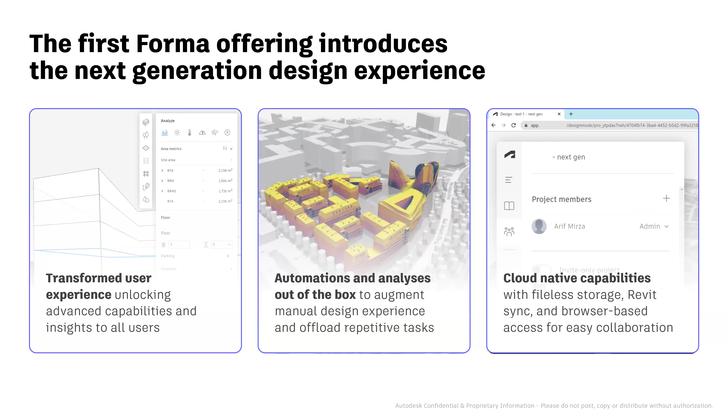These are specifically the five key use cases within Forma. Number one is contextual modeling and handling of contextual data. Second is conceptual design, which is 3D modeling through simple extrude features or push-pull features. But we're looking more towards the next level of 3D modeling, which is automation, similar to how today you might be using Grasshopper or Dynamo.

This is a no-code environment, not at all like using nodes in Rhino, Grasshopper, or Dynamo to define computations. Over here, you don't need the nodes, just values that will drive the entire design flow through numeric entries. It's actually based upon an LLM kind of approach, but a very numeric based one. We have not yet trained it out of the box to work like speech functions and ChatGPT, however, the code allows you to integrate large language models within Forma.

Automation, analysis, and interoperability is a no-brainer because Forma syncs directly with the likes of Revit straight away, and it also imports from Rhino directly. We are building more capabilities so that we can work with apps like TestFit, Veras AI, or Midjourney. They're all on the way to host their extensions on top of it.

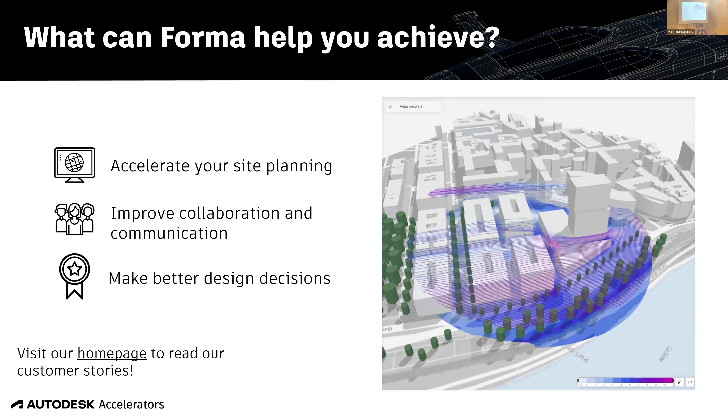Now, we have a long-term vision for Forma. It is actually a multi-year journey. Forma will evolve over the next three, four, five years, and we will see this evolving as an AECO platform, an AECO industry platform covering architecture, engineering, construction, and also operations. The reason it is cloud-based is because of the heavy algorithms for handling big data models. Large models on desktop-based software take a lot of time to be processed, especially when you want to run more than 100.

Then it's going to require cloud computing capabilities, and only through us working with Amazon Web Services, Forma is actually ported on top of AWS. So it's entirely secure in terms of all the certifications. We have achieved all the ISO related certifications for cloud security.

So let's look at the workflows one by one. I would possibly just go into the software itself, which I like to do straight away. I'm just hoping that the internet over here allows me to do that. I'm on my hotspot, so we should be okay.

Initially, when you bring in a project, this is basically how it looks like. You have various hubs - I'm actually part of all these teams, MDC, A49, and so on. But you can create your own hub, invite members, and have your hub settings. Multiple people can work with you on the same project, and you can start creating new projects.

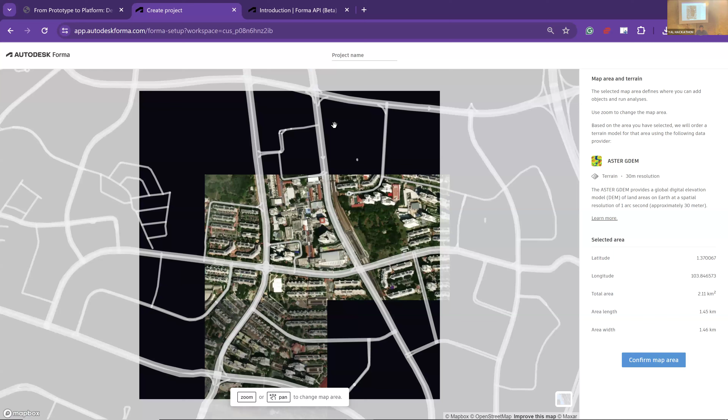Let's say we choose this particular site, and we can go with up to 3.5 kilometers square. I'm just going to confirm this mapping. It's going to now take the data from OpenStreetMap and try accessing ArcGIS and some other GIS platforms that we integrate with, and it will then give you that particular result.

You just went through running it on hotspot. Okay, still works, 10, 15 seconds.

So you do have options to pick different data. Let's say, for example, OpenStreetMap with buildings, OpenStreetMap without buildings, getting a flat terrain, or ASTER GDEM. As we speak, there are more data integrations we are working with. We're also working with SLA so that we can bring in Singapore data. But moreover, we are working with Esri, which has the world's data, and we will bring in more geolocated data for your team.

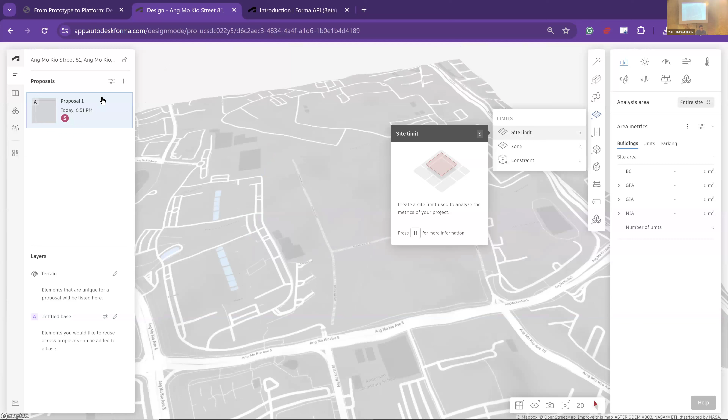And we can close this. So there we go, that's my site limit. Of course, I can always start by simply creating my site limit, or we can begin by importing any models. Let's say if you have existing OBJ, IFC, or DXF models, you can bring those in. So far, it accepts OBJ, IFC, DXF, but through the API extensions, you're able to bring in other file formats as well, like GeoJSON or City GML. It also accepts JPEG and PNG.

So to start with, I can always begin with the site limit, and you can work in 2D for that, just to draft out your site. So I'm just going to randomly create a site here. The site you could also bring in as a DWG. If you have an AutoCAD drawing, it superimposes this. So I can bring it in as a DXF.

And then, of course, you can divide it into zones, you can offset it, you can split it into parts. Like I can just split this site into two parts, and then for each one of the site areas, you can see on the right hand side it will already start computing. You don't have to initiate anything, it automatically captures the data. Yeah, the site data is straight away calculated.

You can start by defining area metrics. For example, you can create an area metric. The area metric can be as simple as these polygons. My area metric, for example, you can give it formulas for GFA, GIA, and net buildable areas. And you can look at residential FSI, floor space index, to be 1.2 of the GFA, and commercial, let's say 2. And we can specify, or we can add more functions. And I can create my metric. Once I create my metric, I would have that specific metric with various GFAs and GIA constitution right away.

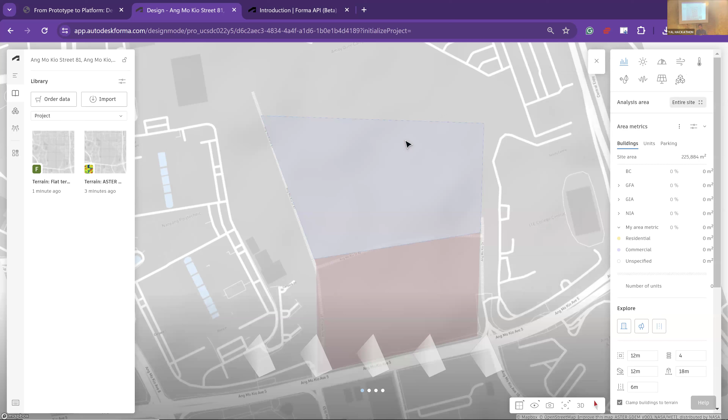Then to begin with, I can always initiate the generative AI, and you can start by simply selecting the site, and Forma will automatically generate options for you. This is also a code that you can access. Now here on the right hand side, I have specific options.

Like I can, let's say, understand the division width. Let's say I want to change the width to 20 meters. It will automatically immediately change your values. There you go. So you try giving it more based on... it's gonna pop up that facade zone, right? It's gonna add more to your options. So here you're not coding, you're just typing values and it will automatically give you options.

But this is where your design is. So that's one way. Once you're done with the option, enter, and I'm in there. My buildings are already populated. You can already see here the total GFA that's been consumed, the GIA that's been consumed, the NIA that's been consumed. All of the data will be populated. And the total site area is always there.

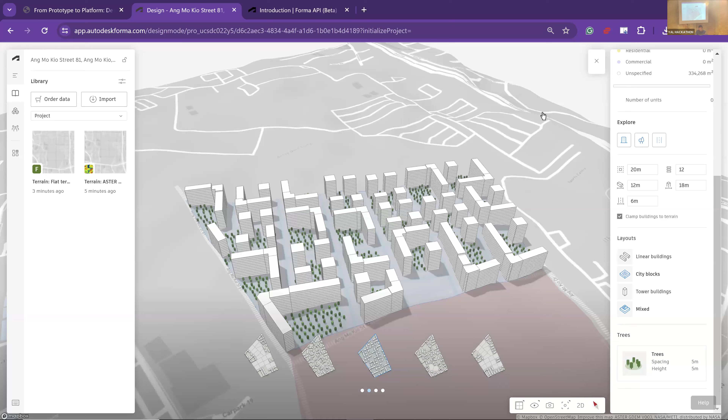And I can also begin by just simply sketching, right, or creating a building pad through automations. I can do a basic building, and I could actually choose the entire site to be the building. And let's say the site that you see popping up like that, right, if I want to create a basement here, okay.

So I'm gonna just go to my navigator and terrain, and you can create a building pad so that you can start with your building design on the pads.

Just being mindful of the internet connectivity, but it's bearable.

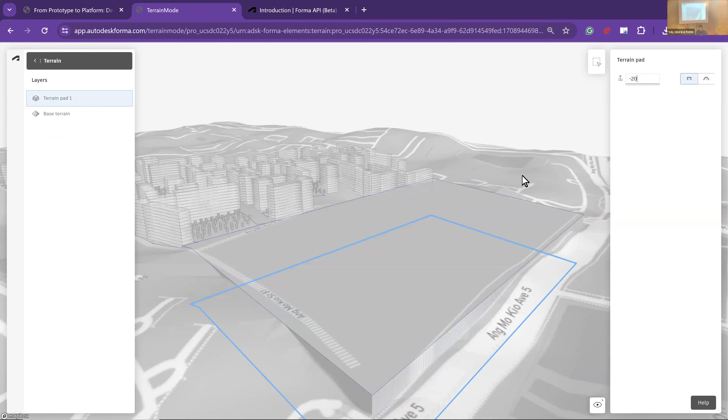We can begin by simply tracing an existing shape and allowing it to fill in the ground, or to go recessed within the ground. So I can go negative, for example minus 20 meters, basement, straight, boom, right inside. So I should be able to work with minus 8 meters.

What kind of slope would I want? If I want a sloping side, I could do that also. So all these are simple features embedded within Forma. And once done, you can always move back.

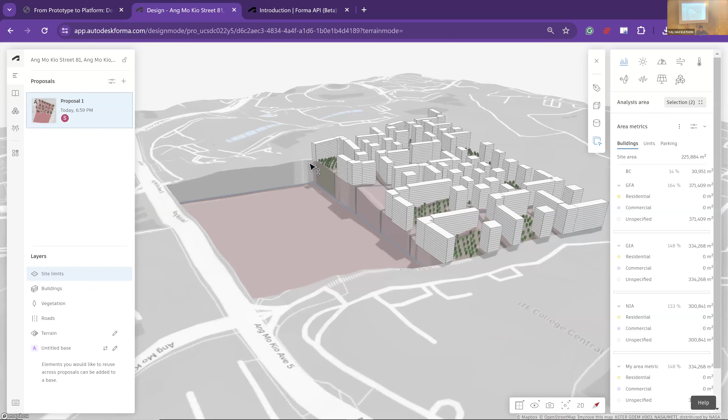So we have this site. Now we can start working towards maybe adding a complete basement over here. Then simply choosing this particular part, let's say 40 for example, that's your base building. On top of that base building, I could actually go inside and start editing the floor plans, any parking, for example, of the floor plan.

Within the floor plan itself, I could start dividing this building. You can actually start drafting using the ruler scale. You can see that it's actually replicating my floor plan everywhere, which I don't want. I could only work on the top floor, like the 13th floor.

Define the space as parking, and you can see automatically it starts designing and giving you the layout. It's quite big, but maybe these zones can assign this space as the corridor on the house or something.

This can also be a small parking area where you can define a different set of rules. So the set of rules for parking can be defined and you can add. For example, in this case, for this parking, I'm only looking at two vehicles, or electric scooters. Then I can have this parking done separately and this one done separately. Just an example.

But you can add more, you can create, you can also delete floors. If you want to delete the 12th floor, the 11th.

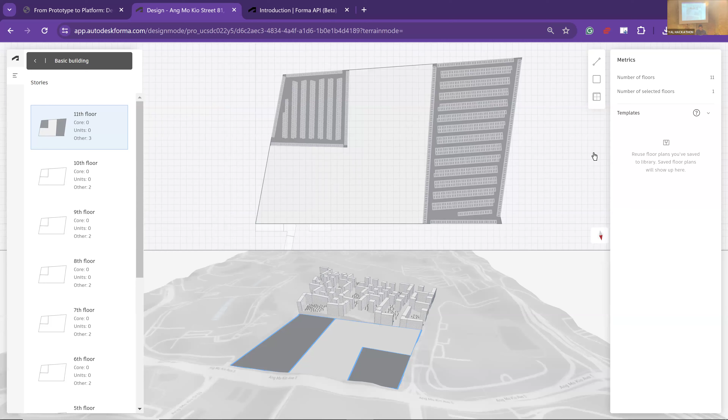There's no real drafting involved here, or neither 3D sketching, but you can also do that. You can actually start 3D sketching. So if I want to begin by creating a 3D sketch, I can leverage that 3D sketching capability. I can show you some examples.

However, some of these basic buildings can also be directly created here, and you can start working towards some standard units and so on. That's the building unit, and I can start adding the height, number of floors, same as for the larger building, towards a smaller building. And probably change the function of this building, make it commercial or residential, and it will automatically update my GFA and GIA based upon it. So there is no manual entry as such. Everything happens automatically when you start giving it different functions.

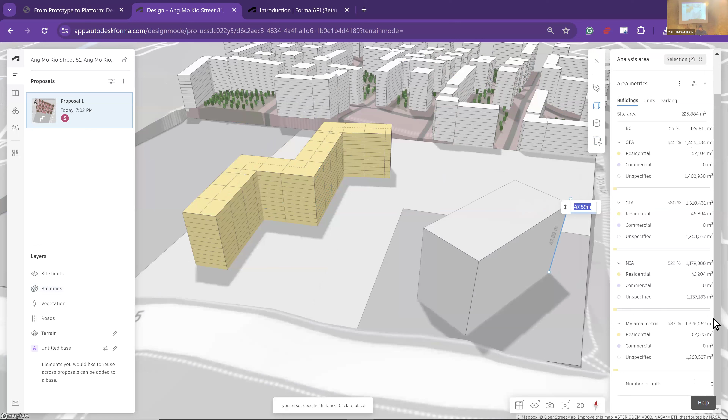Of course, we can work with simple volumes, generic volumes as well, the simple boxes. I'll just draw out some kind of example there. And then this mass, you can actually edit in the sketch mode. So in the sketch mode, it will allow you to do more.

Edit sketch will really work something like if today you use SketchUp, or maybe in the past you might have used FormIt. NURBS modeling is something which it doesn't do today, so you would probably have to use Grasshopper or Dynamo to bridge that gap. Because we have direct extensions, you should be able to do it. We'll look at it.

So I won't go into the editing functions because it will probably take more time, but I'll show you some examples of some different forms that we can do.

So that project has been saved. Now if you want to pass it on to someone else, you can invite project members so that they can start contributing.

So now I can add project members and invite somebody who is a collaborator. I can just type in here the email. It could be a collaborator or an admin. You can give access and send the email. If you guys have your laptops, I would encourage you to just try, there are trials.

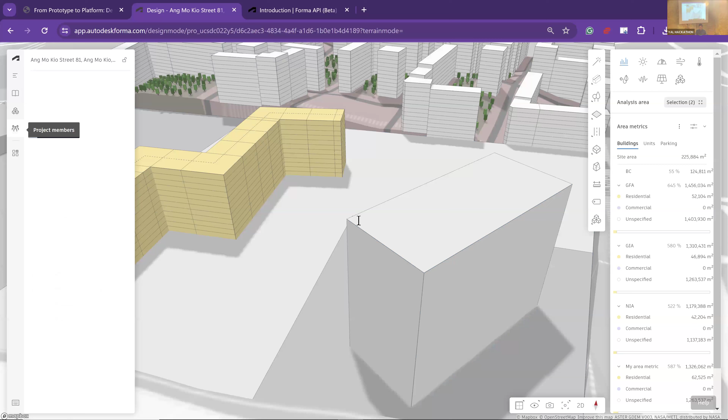Now I'm going back to a project which I've done before. But remember one thing: the approach of Forma is different than our traditional sketching and 3D modeling tools, because we start with data in mind, with outcomes in mind, and we don't really start with lines and squares and rectangles and so on. We actually begin with data in mind and with some outcomes in mind.

However, sketching capability is there, but I would encourage you guys to really start thinking through data modeling or through some analysis that you'd like to try. Then form will automatically follow the function, but you first determine what function you will do. So I'm going to go to the existing example.

I have multiple proposals in just one project, and you can see how many collaborators I have. I have Tablan, Vivian, and Tanya, and so on, John, as my collaborators. So multiple people can work on the same models, different proposals. I have roughly 5 proposals here, proposal 1, proposal 2, proposal 3, and the site data is consistent across all proposals. There is no real copy pasting here. Everybody is using the single source of truth, the site.

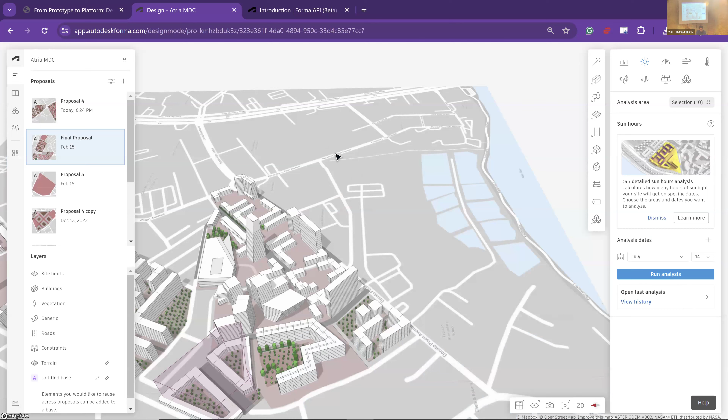And there are some existing buildings here as well. Just for form itself, you can see that you can create buildings like these, right? You can also create curves, but this is just an example of an edited sketch 3D mode. And I can edit that in 3D sketch as well straight away. I could also create forms like these, tapering forms. So there's really no limit in terms of what forms you can create, except NURBS modeling.

Remember, double curves will not be modeled. You would have to use Dynamo or Grasshopper to really do double curved surfaces and so on. Single curved surfaces, yes, you can do it with Forma. Single curves, it works.

Okay, so let's go in there. And these kind of things, right, they're just editable on the spot. Say, for example, I'll just zoom in. You'll see that all these points are editable and it impacts your entire flow. So it gives you those editing capabilities and you should be able to work with different building geometries.

Right. And then individually, you can also change the parameters. Same way, I've created different floor plans for this particular building, and in the plan, edited this geometry as well.

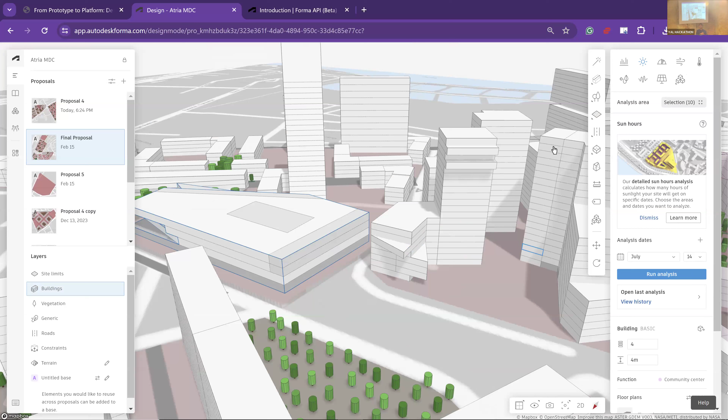Let's look at the analysis capability. So those were the modeling capabilities. You can also add roads. The important thing about adding roads is it will help you for your analysis. So let's look at this road. This particular road has data that I would use for analysis. Number one is the speed of the road, the limit, right? Is it 100 kilometers per hour or is it 60 or so?

The average daily traffic, 10,000, up to you. You can get the details from your nearest traffic station, or if it's available online, you can get the data from there and key the distribution of your traffic: morning 84%, evening 10%, night is 6%. Heavy traffic is 50% of the time. If it's a busy road in the city, you can say that it's 50% of the time. And that will be helpful for the noise analysis.

Now, let's go to analysis. First, of course, area metrics. I can quickly run through area metrics, which is how much area is consumed by hotels, how much area is consumed by commercial, residential, all of the area distribution. And you can see that immediately, you can go one by one and check on it.

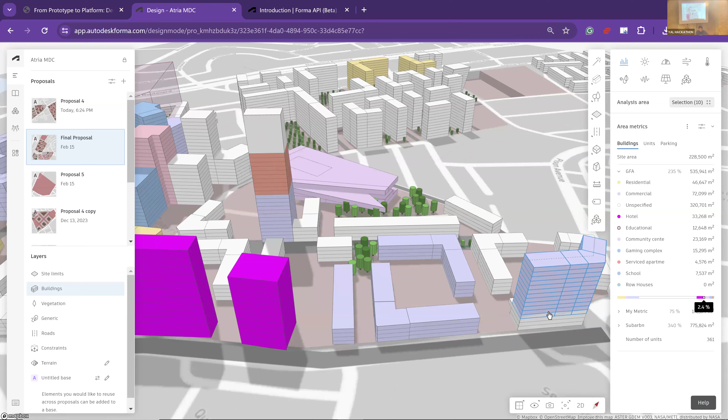Now let's say I convert a particular building, you can see that the educational area is about 12,000 meters square. But what I'll do is I'll take this building's function to education as well. So immediately my education area should pop up, it should increase, the overall education level. So now it's 17,000 meters. Instantly the data is just connected to each other. You remove the function, the number of square meters is gone.

Even if it's a single floor, you can still change the function by floor. So one floor, I want to change the function and set that specific floor as, say, a school. You see that immediately, only from that floor, I've changed the function and it will impact my overall area metrics. There's no calculation I'm doing for this—it's automatically getting picked up by the AI or the engine. Right, so that's area metrics.

Now we look at sun hours. Let's go to historical analysis. Normally the analysis will take anywhere between 20 seconds to 2 minutes for sun hours. You can run it, or I'll just read the historical analysis.

So on January 23, I did sun hour analysis, and it keeps a digital record that is maintained. So if you did an analysis 8 months ago, it's still there. And once the analysis is done, you can actually start inspecting this.

Let me just hide the controls. So here, I want to analyze the spaces which have less than 4 hours of sun. Because we are in Singapore, we are on the sunny side of things, so you're going to have more sun, right? The majority of the surfaces of your building has sun more than 5 hours.

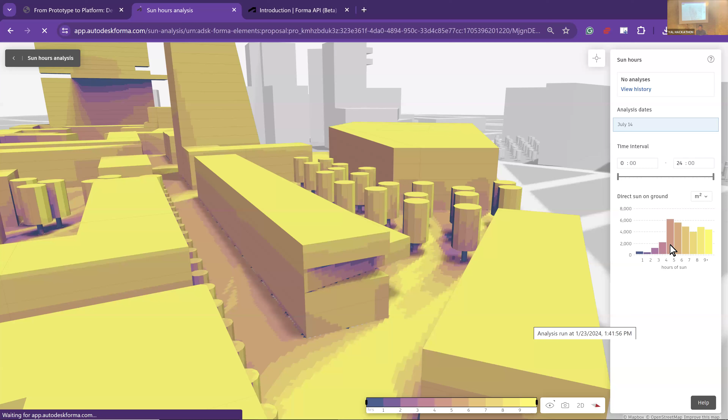You see that, right? And here you can also look at the distribution. You can see that the average sun hours on the left hand side is 4, and it covers 30,000 meters square that is greater than or equal to 4 hours, and 4,769 meters square is less than 4 hours.

So it took less than 20 seconds to regenerate based upon my time, right? So now you can see that my sun hours has probably grown a bit low. Then I can even inspect wall by wall. If I want to go and inspect here, it will show me that this wall, this facade has 4.7 hours of sun. And you can inspect all of the builds.

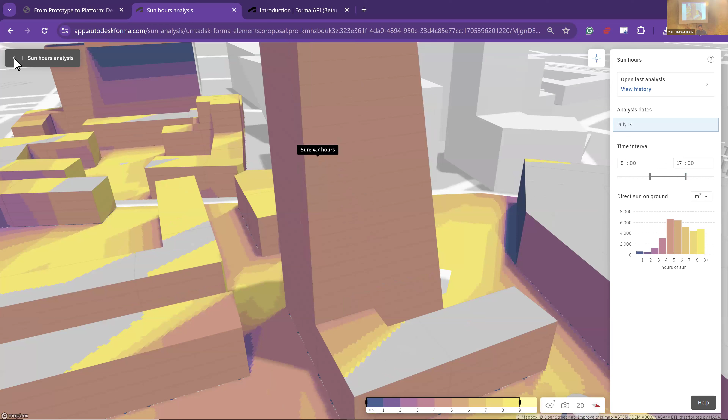So that's sun hours. Similar goes for daylight. Daylight is quite important because some of the functional spaces which are always inhabited by people, you want them to be lit by natural light. So you can try and understand which are those spaces.

So I can go to daylight potential and here I'll get a percentage. So here you can see the achievable daylight. So this is all in the dark zone, like 15% and so on.

But there's very little, as you can see here, these buildings are very close to each other, so most of the spaces over here don't have enough daylight. You can instantly understand them, right? And if I want to inspect, let's say for this building, this patch is completely under the dark, I can inspect this and say only 9% of the time there is daylight entering this.

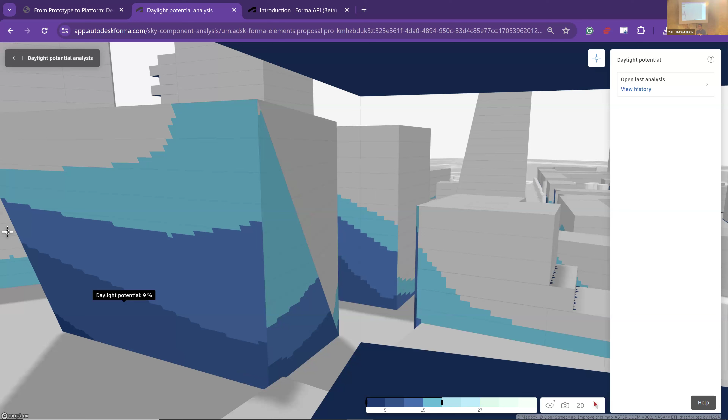So I can take those informed decisions on where, even if you're generating a particular design or a form, that will have an impact on the natural elements that we design. So we can change the form to enable more daylight in this case. Of course, this is good because it's inside, so it started capturing things like niches and so on.

So the data analytics and the representation is the same for all kinds of analysis, which always gives you a slide bar below and a bar graph on the side. So it's good.

So now we can go to wind simulation. It can take some time, might take 30 minutes or so. So you can actually open two browsers - in one browser, you let the wind simulation run, and in another browser, I can just open multiple browsers.

If your internet is great in the office, you can open 5, 6 browsers, it doesn't matter. You can have multiple proposals open because it's web-based - cloud computing, unlimited users, unlimited.

Effectively, anything above 100 Mbps would be good. If it's 50 or 20 Mbps, it's gonna be cranky, so I would advise not to. Anything above 100 Mbps, 1 Gbps, it'll fly, right? So it really depends upon your internet speed.

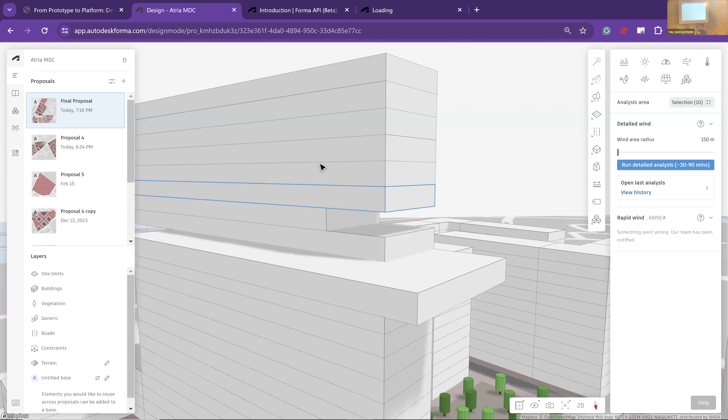AI rendering - yeah, we already have Veras AI extension in here. So you can use Veras or you can use Midjourney, but Midjourney right now is not on the platform. In future, you will see them coming in, but you can use Veras AI.

So now what I have here is actually the pedestrian comfort. The wind drag or retardant effect, or whatever you call it, creates pockets in the city or urban areas where you'll see standing zones where people can comfortably stand, but there are uncomfortable zones which are the red zone, and zones where you have to walk in order to feel comfortable. So you can inspect those zones.

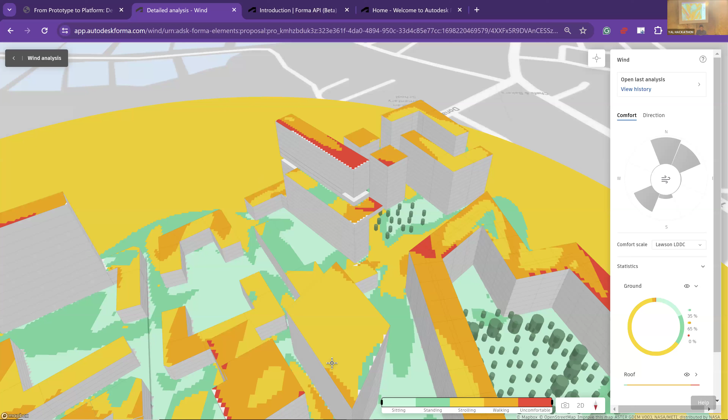Let's say this zone here, I wouldn't want to place a public space over here. I want to place it here so people can comfortably stand. That analysis you can do, and you can understand that standing dominating direction here is north. Over here, walking dominating direction is also north. You can see majority of the ground is actually in the strolling or walking zone because of the prevailing wind conditions. However, there are some good pockets where you can start putting in some public spaces.

So it will give you that kind of analysis. If I want to filter further, I can say I want to look at spaces which I can use. These are your pockets within the urban precinct that can actually look at popping in some public spaces, or have a cycling track.

So that's fairly confident. Now, if I want to look at the directional data for the wind, let's say I want to look at south, and stream height variations, and make them visible. See that the wind simulation is directly accessible. It will show if there are any vortex formations and so on, it'll be able to simulate these conditions. If I change the wind direction, it will automatically change its CFD.

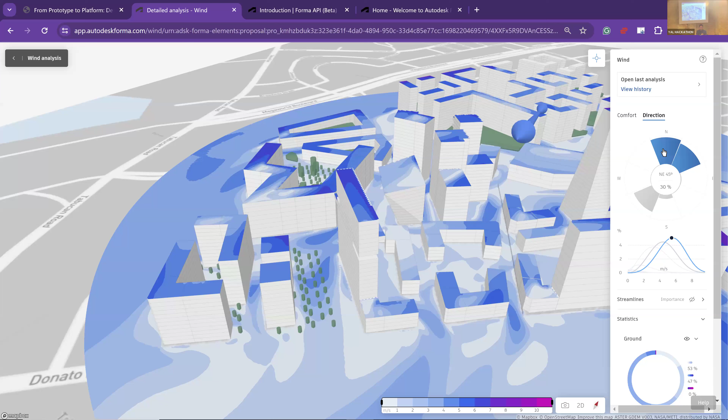We use OpenFOAM as the engine. OpenFOAM is popular; many CFD softwares out there use OpenFOAM as well. If more details are to be understood, you could look at our documentation. There are white papers we've written on what goes behind this. So if you want to use those in your submission, you could do.

Like RSP Architects in Singapore, they actually used the background data as part of one of the submissions. They did win the competition. They used Forma to generate all this analysis in their final proposal.

Again, you can work towards height variations, or you can only look by height, meaning how to check at 8 meters or something like that—only at that particular level I'm interested. So I can say I'm only interested at 20 meters, then my CFD or the vectors are going to be active only at 20. So there's a lot of data drilling you can do so that you can represent your wind much more efficiently.

Okay, any questions around this?

You can extract images from it, but if you're looking at them to be 3D lines in space, for now, no. What's more relevant is the report. When you design, what we're trying to do here is once you understand how the wind flows through the area you're planning, you orientate your design so it allows you to capture as much wind flow as possible. With more wind flow coming through your building, like these houses, you improve the thermal comfort. That's what makes your design more optimal.

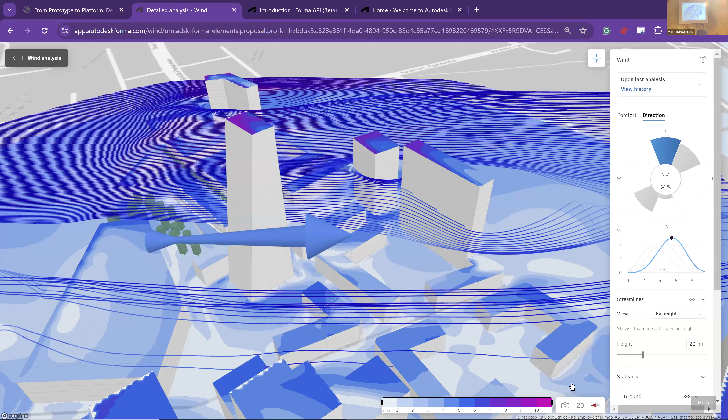Well, you can capture the image. You can do a 4K screen capture, you can save the camera position, and you can extract the PNG, but 3D geometry of the CFD, not fun. No—you can extract the buildings as a Revit model or as an IFC model, but the CFD lines themselves are only for you to create a report.

So that's not even possible. We can check, but I'm not really sure whether the embedded view API will work, because it's an embedded view API, so anything embedded in the view, you should be able to access. And that's the objective—if you think that's a use case for you, you can write it down for now, and we can document all these use cases. Forma is an open platform; the API is made available to you, so anything you want that's outside what we provide, you can develop.

So like, do an editing in there, right? Then let's see if I can. The analysis is there, it will stay, but I can edit it a bit.

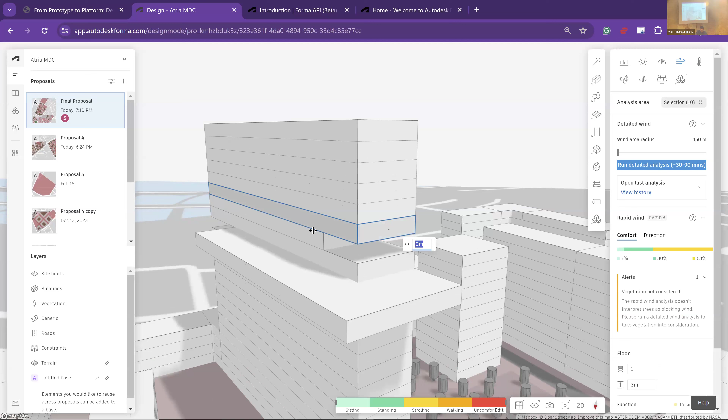Yeah, you can save that. Right now I'm just going to create a pocket here, edit this first. I'm going to create a bigger pocket and we hope that the wind lines can go to, or like, cutting through.

You probably have to edit in 3D Sketch to do that. Within this, okay, there's a way. Hold on, we can edit the floor plan here, let's go and add the pocket plan here to be able to create a hole. So that's this one, okay. So I can potentially space and delete, yeah delete that. So I can create it, but you have to define it in the plan. Okay, so the void is...

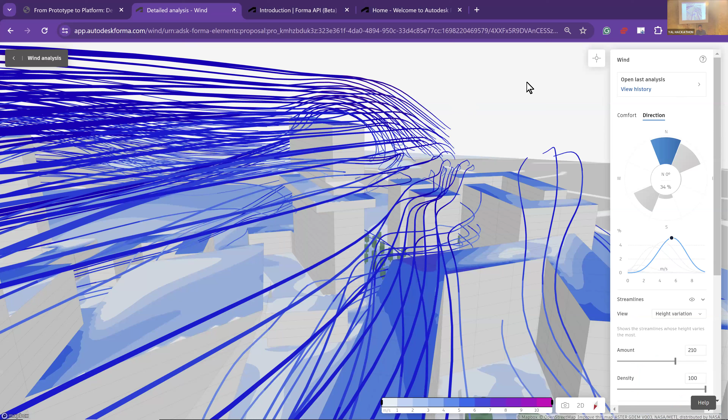Okay, so let's go to another analysis, which is microclimate. Now, microclimate, there is no history for now, so just run the analysis.

Well, on another window, we can look at another analysis. Here, let's look at operational carbon consumption.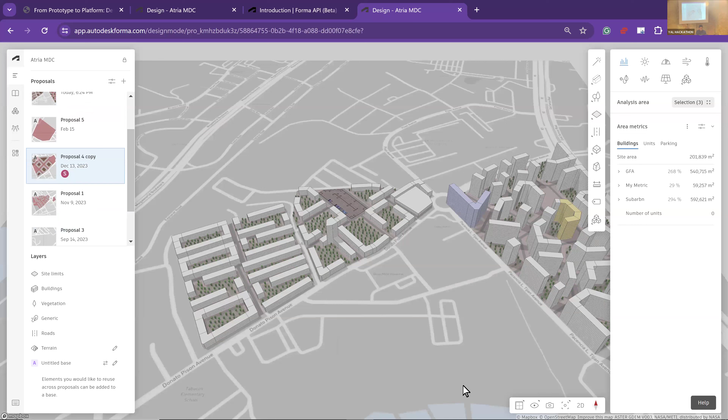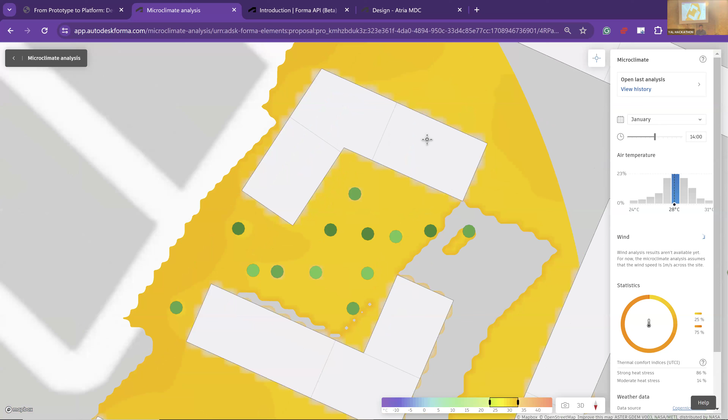So it's ready, right? About a minute or so. Now we can look at the microclimate. So we just took this area. We should define the area in detail, but you'll be able to see whether this particular zone, what is the temperature there. Almost everything is above 25 degrees anyway. So if you change, you can see this zone, this is less than 30. No, everything is above 26. Then you can inspect here, so it's 31 degrees, and here it's 31 as well. However, in some other pockets outside, here it's about 36 degrees. So you can simulate the microclimate in any zone like that.

So roughly 75% of the analyzed area is above, let's say, 36 to 37 degrees. We have 5.5% in 32 to 50. It also captures the humidity and so on.

After microclimate, we can look at operational energy. So operational energy actually depends upon what materials you use, or let's look at the criteria. Right? So if you see right now, if you look at the settings, the advanced settings are still in beta, but you can define, let's say, if I define an uninsulated roof, it's going to change the amount of energy I'm going to need.

So here, the range is 132 kilowatt hours per meter square. Buildings which are running anywhere between 164 to 196 kilowatt hours per meter square. So if I change it to uninsulated roof, it will immediately change the operational energy factor, going beyond 200 already because the roof is uninsulated. If I change back to insulated roof, or maybe insulated with wood or something, for now there are limited options, but in the future there will be more.

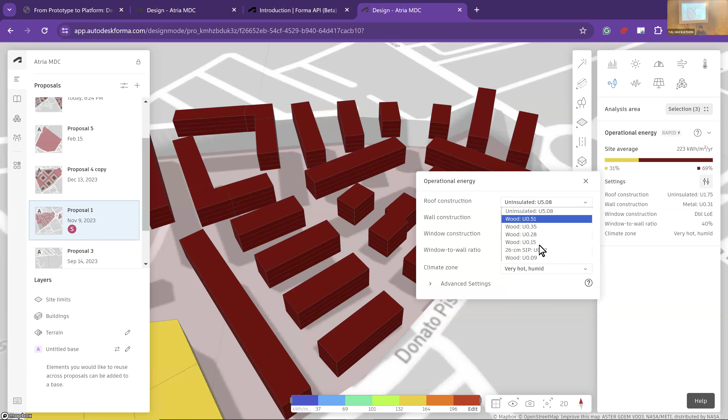Noise analysis. So noise analysis is interesting, let's look at this zone for noise analysis.

Like I previously mentioned, if you have your road factors and the traffic density in there, then it will give you the noise solution. So now I can see that 75% of the spaces are in a good noise zone, which is less than 55 dB. You can see that these facades are impacted heavily by noise. Okay, so if you change the traffic conditions, this will also change. I can see that 12% of the facade is having more than 65 dB, and 14% of the facade is anywhere between 55 to 65 dB.

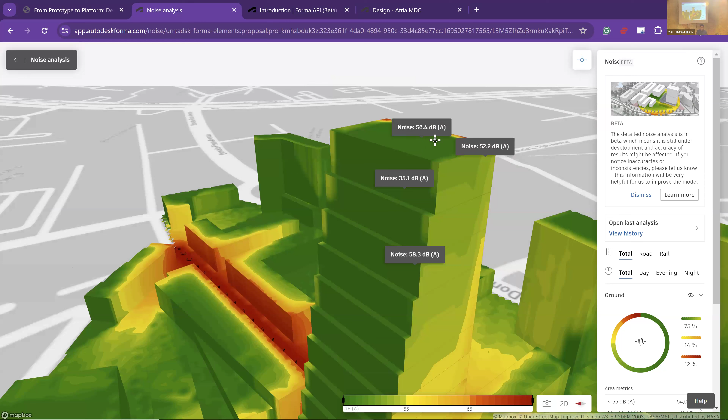So whatever is acceptable to you as a designer, you can take a decision or propose a different kind of facade treatment to address the noise. Like here at 65 dB, it's quite a high level, but as you go up, of course, it's going to go lower, 58 dB, as you go higher, 56 dB. On the sides it's 52 dB. So anything you see green is beautiful for the ears. 35 dB is great, no sound. So you can analyze your sound.

After sound, you should have the solar potential. A solar potential was added recently, like 2-3 months ago. If you look at solar energy potential, this allows you to look at the total energy that you can generate. So let's look at the historic analysis that we did, number 9, just going to run that analysis.

On the right hand side, if you look at the entire roof of this whole block, whatever buildings we have selected is going to generate 98,670,487 kilowatt hours of energy. That's the total solar energy. Average solar energy per meter square is 1688 kilowatt hours.

Now if I increase the surface coverage or the panel efficiency, the amount of energy generated is going to go up. Let's say you're using advanced photovoltaics that capture more sun, that increases it by 20%.

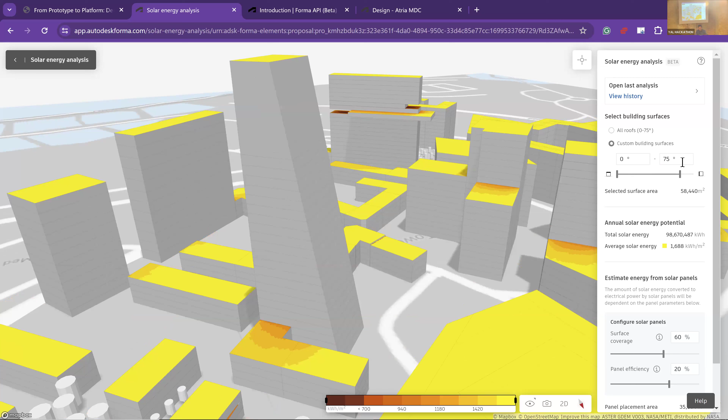No, it did not. What can I look at, 80? Yeah, it got it, there you go. So this facade is more than 75, it's at 80 degrees.

Place solar panels on this particular surface, and your average solar energy is going to be a certain number for this space. This is going to generate roughly 666 kilowatts per meter square. So instantly you're able to understand the total solar energy, and hence how much carbon you can save, and you can immediately run an analysis on it.

Any questions on this one? So the analytics is the same for everyone - the representation levels, the filtering, is all the same for all analysis.

Sorry, landscape replacement - I need to understand that more specifically. How would you do it in normal circumstances? It depends on each area. For my project in particular, in my area, we need to have 40% landscape placement on the roof. That's throughout, as in anywhere. Yeah, so if you cut a pocket here, you have to add it somewhere else, right? Yeah, that's a good use case for right now.

Just trees - I raised this question to the product team, whether we can start adding scale. I think right now we can only do the trees, we can only do one. I can't really go and place landscape.

For the trees on the ground. Yes, but not for the wall. By the area of trees, let's say I define it like here.

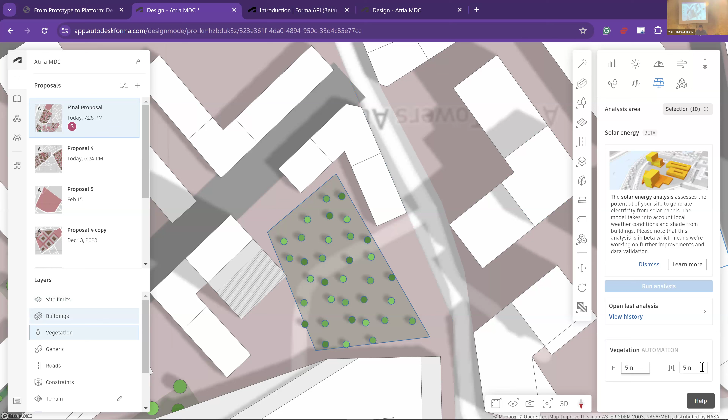The 2D view isn't always great. It means we can plan here, here, here, okay. So for that area total, you have the height of the tree, the distance between the trees - let's say a distance of 3 meters, you can use that. So all of that you can do.

And I think in the area metric, you should be able to get the vegetation area as well. So let's look at vegetation.

It's still manual - I mean, of course you have to define the surface where you want to place the trees, but it's going to get considered in your microclimate analysis, so it's going to reduce the temperature in that area.

My humble request to our product team has been, 6 months ago, to add it on the roof possibly, because I'm a big fan of green roofs. I'm a Kenyan fan, so that's the reason. That is why that's being processed - exactly, because everybody asks me, so I'm sure.

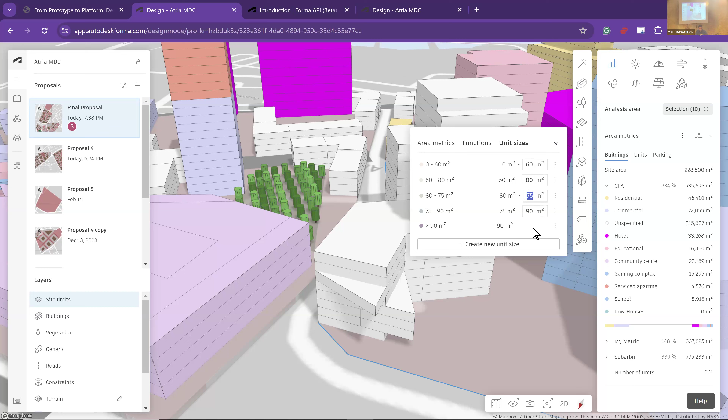The unit sizes, you can give definitions. If I'm running unit sizes, I can give my minimum size as 0 to 60, then 60 to 80, then 80 to 90, then 90 to 120, and anything above automatically captures. Potentially, you should be able to create a new unit size and more sizes.

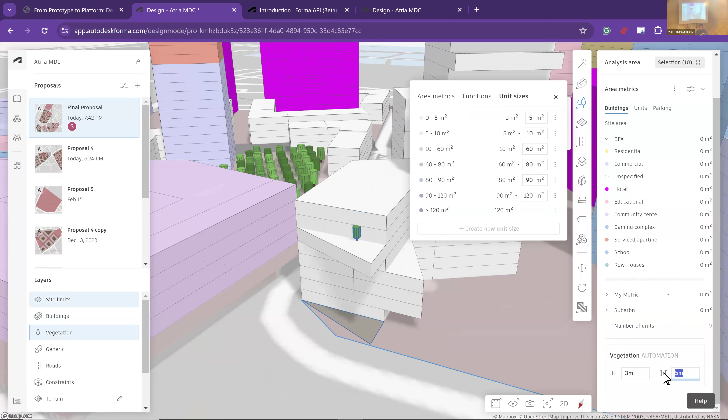So we are done with the analysis. There is this analysis right now, and the extension is what we will go into. So let's look at Dynamo, Rhino, some of the configurators. So this is all out of the box.

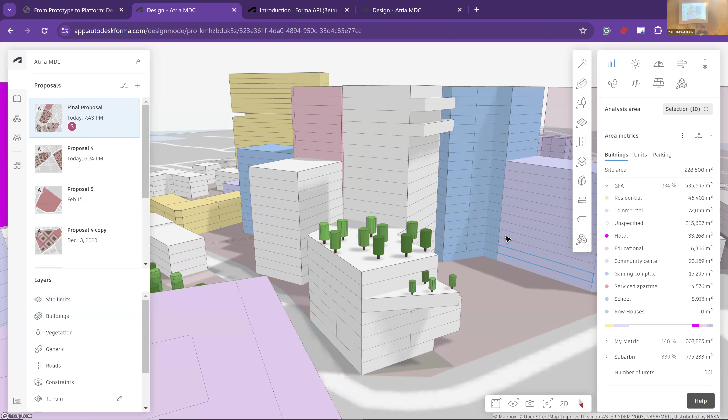Forma's usage is up 10x since it's launched. We have more than 200 architects using it worldwide. Only for the out of the box features itself, you can start leveraging on them. Of course, it is a web-based platform, so your browser settings are going to impact the software.

Let's go to the PPT, straight to Rhino plus Forma. Sending proposal to Revit is something you can see now. So this is Forma, and we can send this data to Revit straight away. So that's your Forma, and this is Revit, and through your direct plugin from Forma, you can directly show the data.

Let me show where that is. Let's say this proposal, I'm just going to go to a smaller proposal. Let's see whether it opens. Okay, so it's a smaller proposal. Let's go to this one, here, no, this one. So these three dots, and you can send this to Revit. You have to download the Revit add-in. It works with 2023 Revit and 2024 Revit, and you can send the data to Revit. You can also export as an IFC and as an OBJ file.

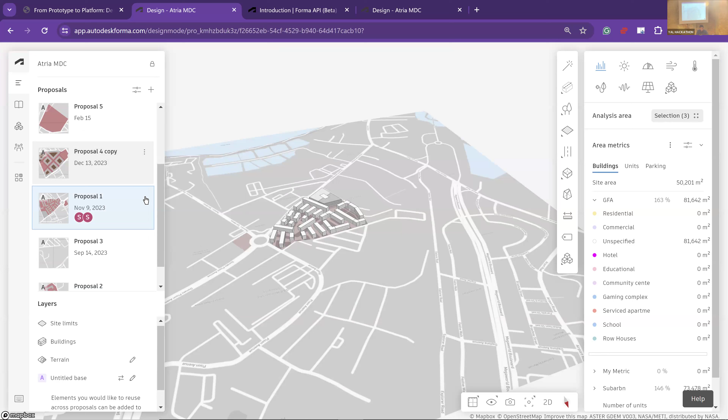Let's just go here again, send to Revit. And it should... so the proposal has already been sent to Revit. If you open it there again, you should be able to find it. I'm just going to open Revit for a while.

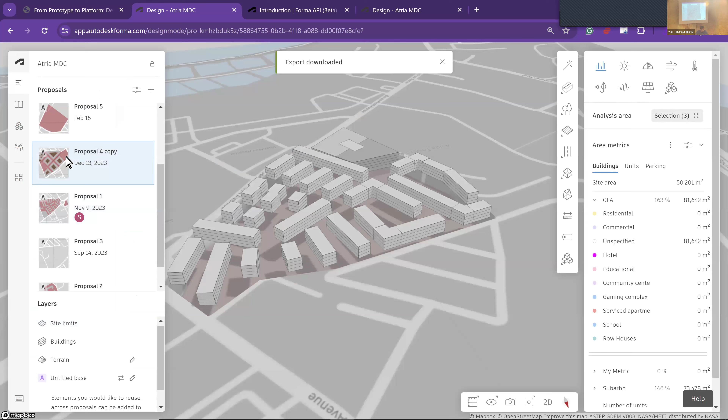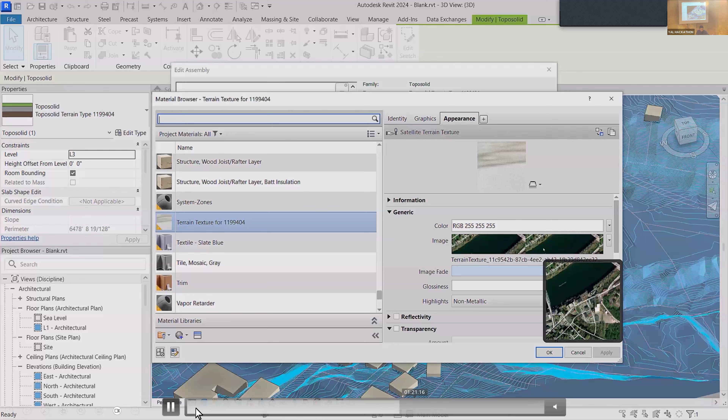The good thing is that within Revit, you will have a chance to define walls, floors, and materials for walls and floors. Every surface in Forma gets exported as a Revit wall, so what wall structure you would want to export, you can define that. Every floor division will get exported as a floor. Just load the proposal. We're going to pause here. There we go, so the wall itself will give you an option to select which assembly you would like to use. That's the building, and these are the floor types and the wall types.

Directly start placing your spaces, rooms, extracting drawings, 2D, 3D, send it to rendering engines and so on. One thing, the extensions over here in Forma can be found under the extensions tab.

These are all the current extensions.

If you fancy doing AI rendering, I would suggest you look at Veras AI. It's by Evolve Lab, which is a very active participant in Forma development as well. I don't think they charge more than $30 or $40 for one user, and anything you buy from them is on their website.

However, they have decided to port their app on top of Forma, and we will see more companies doing this. We have Snaptrude, and another company, TestFit, Plexer, and ShapeDiver also is now ported on top of Forma. You'll see more and more companies porting on top of Forma because it's really getting treated as a platform.

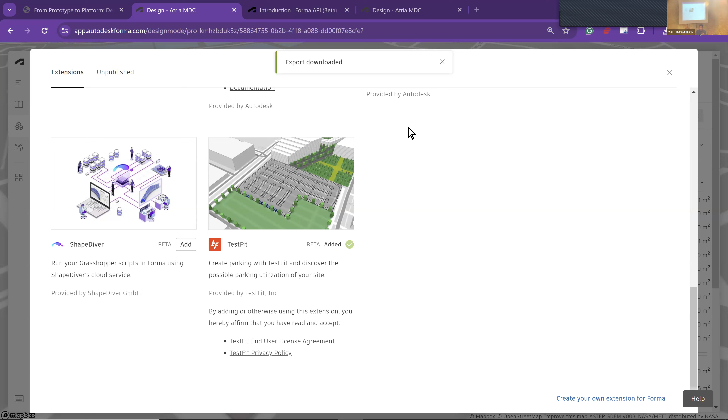That's why you will see more and more data getting populated. So the Revit add-ins, Rhino add-ins, the ShapeDiver add-in, like the Dynamo add-ins, all are part of this, and you can start using them. So check the policy and add that to the extensions.

Once you add it, you should be able to see this here. Now you can sign in with your Veras ID and you can run your AI. Let me show you an example.

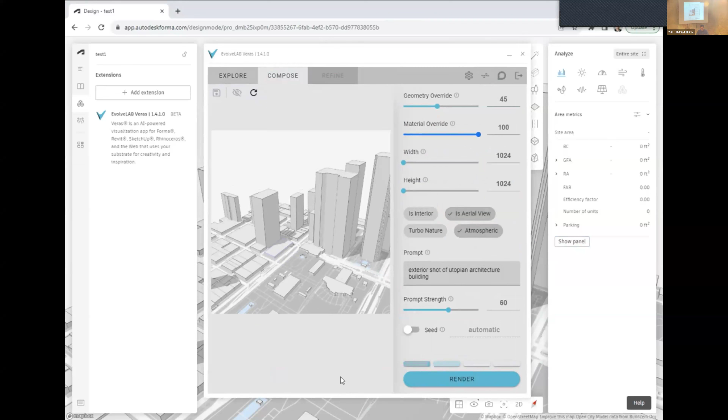There is AI, right? You can log in and all the Forma geometry in the background will be recognized in the AI render. You can choose between different natures, different effects. It was similar to Midjourney. I haven't used Midjourney myself, but Veras AI is also quite popular.

So let's say you can define a specific area, use the large language model, say 'timber building,' and wow, it changes to timber. So within Veras AI, there's this LLM integration where you just type in what you want.

Constraints modeling is something I haven't directly shown you, but it's embedded within Forma. We are potentially building a checker out of the box. It's not specific to any country, but it will highlight violations beyond the constraint zone. The constraint zone is nothing but a 3D model in Forma. So that could be one of your use cases if you want to extract some kind of rule definition.

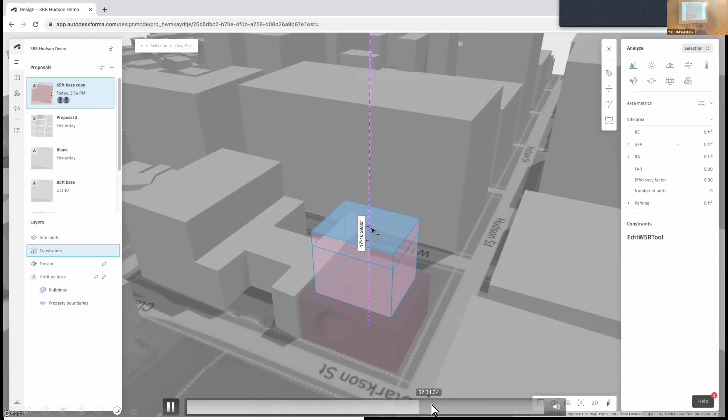That's a constraint box. We'll have a quick look at how it can be created. Just pushing it forward, so that's the constraint box. You can model the simple constraint box with extrude and push-pull. Constraint, you can also implement it this way—you can push back, and that becomes your inclined constraint.

And in the future you will see this coming soon. Our team is working on it, and I think this year we will release violation detection.

Correct, and the area will be highlighted. Let's say you're only allowing a certain amount of area constraint—anything extra beyond the constraint will be highlighted. So 20,000 meters square is extra out of the constraint.

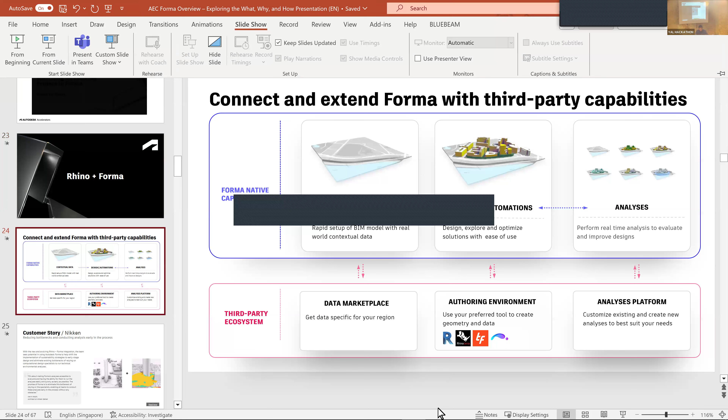So in general, the concept for the third-party ecosystem allows any software to integrate with Forma, because it's an open API. We work on the AEC data model, which is a neutral file format. As soon as you put your data on Forma, all formats neutralize. In the background we're using SVF, but that handles almost all kinds of data.

So one of the key users is actually Nikken Sekkei, an architect. If you would like to connect with them or see how they use it, feel free. The case study is on the web, and you can find out how to use it.

Now, first, the workflow for Rhino would be, of course, create a project in Rhino, bake the data in Rhino and push it across. As you can order the world data within Forma, prepare the site, analyze, compare, and show.

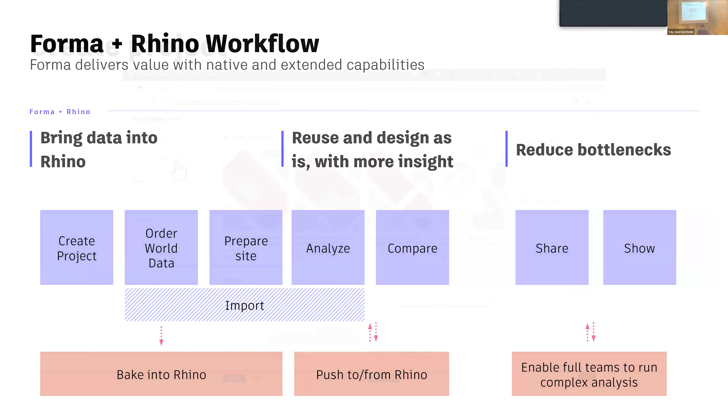So the creation of the project, you don't have to see that, but you can prepare the data for Forma. Let's say you have a specific site. So again, I'm defining the plot boundary.

Then I'm adding more geometries that I can bring in using an IFC object. You can see that you can bring in any OBJ or IFC that you have downloaded from any website, like TurboSquid. I can bring it on top of it.

And you can actually now log in to the app and import this data into Rhino straight away. So you are now prepared. The next thing we'll do after preparation is start designing.

So I'm going to bring my site data. Sorry for that.

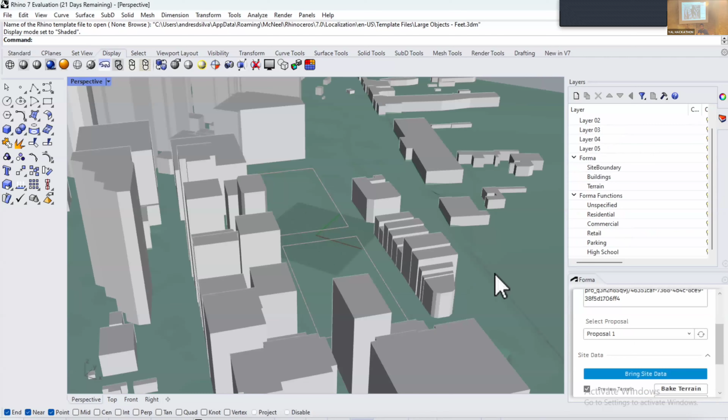So on the right hand side, you have the Forma app within Rhino. Once you download this, Forma actually sits as this particular window. You can bring in the terrain, the buildings from Forma straight away.

Then I can start modeling in Rhino after defining the site. Let's say Rhino, you know the view. You can just model any shape, integrate Grasshopper, it's up to you because now you're in the Rhino interface. Just create a model in Rhino and exchange with Forma.

That's your Rhino box. And I'm just defining that, so you look at the Forma functional layers on the top right. These layers are actually the Forma functions. So each block in Rhino can be a function in Forma.

You can define which one, and then I can bring in the data from Forma and upload it. Just go back — so that's a simple block that we created in Rhino, and now we've got it in.

Now, of course, you can perform an analysis. The block will work the same way as other geometries. Now, I can look at commercial — in this case, I'm going to make a cylinder, a bit of a different form.

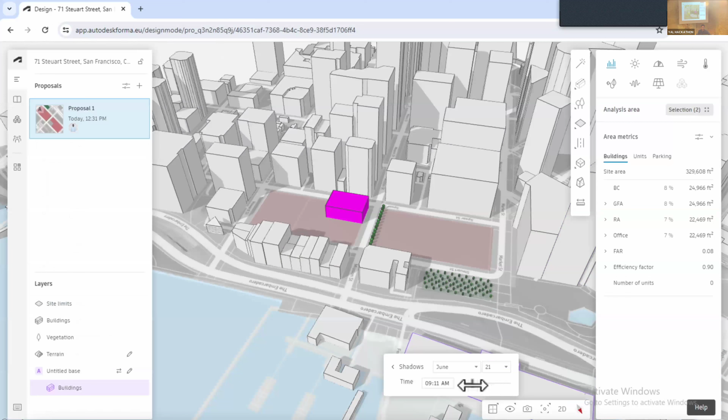We're just looking at two different geometry types, a box and a cylinder. Then we're just going to repeat the floors. That's your building.

Going as commercial uniform. Now, let's bake this and send it across to Forma. I'm going to log the layers.

Bottom floor, we're going to change it to retail. So you can see that I've changed the bottom 4 floors to retail. The above will be commercial.

Okay. So all these changes then will be reflected in Forma Studio. Push the data now.

This is all commercial, and the top can be anything else — residential, right? Multiple stories. Add more information.

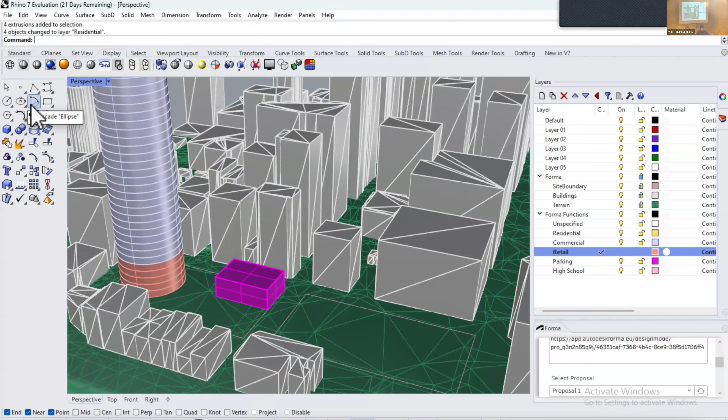Modeling part. Let's now bring the cells in. See this.

Push it forward, just going to push it forward. So this link today is actually a bidirectional link, right? You can see that automatically as I make changes in Rhino and then just refresh the screen, it automatically changes in Forma. And I can run the analysis in Forma.

I'm going to change the volume. Let's say I'm going to add another building in the link, right? See that it automatically gets added. So this is just going to improve, right?

It's going to get faster. Any change I make, it's a direct connection.

So how many of you use the direct Twinmotion or the Enscape live sync? It's going to work like live sync. So any change in Rhino will instantly update it.

So we're working very close with the McNeel team, and now there's also Grasshopper integration. So here...

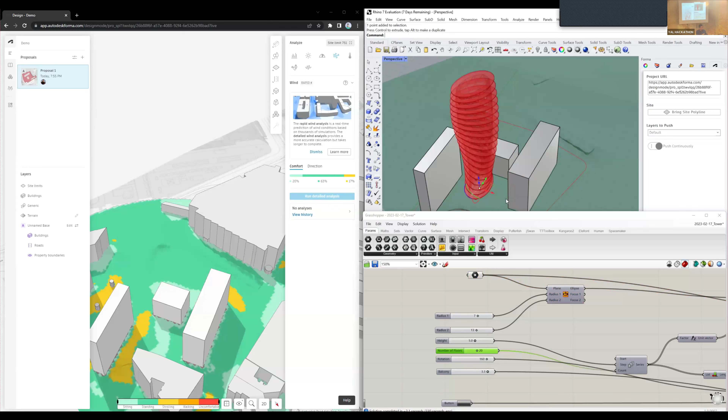I wish you could test it for yourself, but if you wish to run some sessions on this, I'm happy to conduct them myself if you have the time.

The analysis will work on any kind of geometry. There's a difference: when you're modeling, you can't model NURBS curves, but you can analyze them. The analysis is neutral, you just consider this.

Now this thing we've already seen. Let's look at dynamic.

In general, this is the workflow that we are targeting at Autodesk, so we can address the full life cycle. There's a bigger hidden agenda behind this: sustainability. We want sustainability data to be captured right from day one to the end, let's say to the beginning of operations.

There's a big data model right now that's happening. A lot of Singapore developers sitting in the One North office are working on this in the background, the AEC data model, together with the US teams and the India teams.

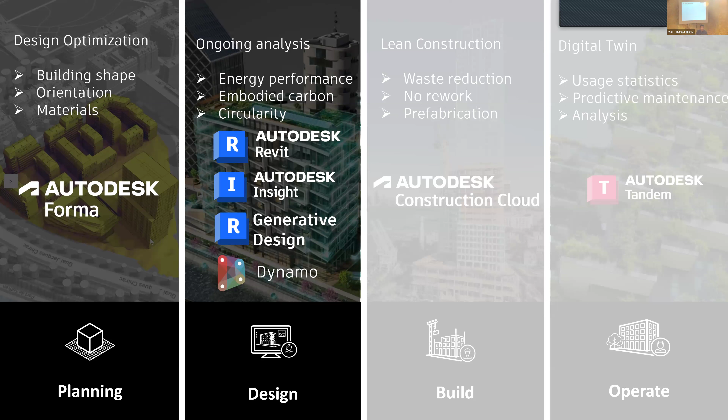Let's focus on the planning and design part because we haven't moved Forma to build and operate yet. But next, let's see Forma getting advanced in construction and operation phases. All that I'm going to skip.

Let me explain this. The Dynamo app can also be downloaded straight from Forma itself, and you can start using it within Forma. So let's look at how it works: Dynamo player. How many of you are familiar with the Dynamo player?

You have it with the generative design. But Dynamo player, have you used Dynamo player?

So we are actually using the Dynamo player to convert the nodes into editable values in front when you start using Forma from Dynamo. Any geometry from Dynamo comes straight across without any formats, and you can load the changes in the form of the Dynamo data.

And vice versa, I'm bringing the Forma data to Dynamo, which means I can pull this individual building data. That's the answer to the question. If you want to take one building from Revit or from Forma, you just use this Dynamo extension to pull it, and it straight away generates a Revit building.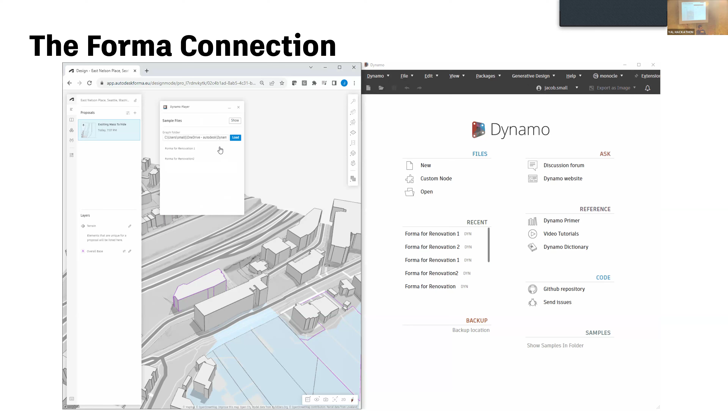But there are nodes in Dynamo related to Forma buildings which you can use straight away. This one is a Forma element node. You can see here, existing building Forma element node within Dynamo. So you just pull the data from it.

No, okay. So there are many things that are possible, but I'm going to run through this very quickly, just so that you guys get all of this.

So many people do such kinds of things, and of course they're bringing in the OpenStreetMap data, the files that they're capturing. Now, from here, they're actually capturing the GIS coordinates of existing trees.

They're bringing them into Dynamo, and hence bringing the existing trees back to Forma. That's a use case where you can look at existing site conditions, the flora and fauna around the site, and bring the data from OpenStreetMap. The CSV file is actually the X, Y, Z for each tree, and that data can be straight pushed into Forma.

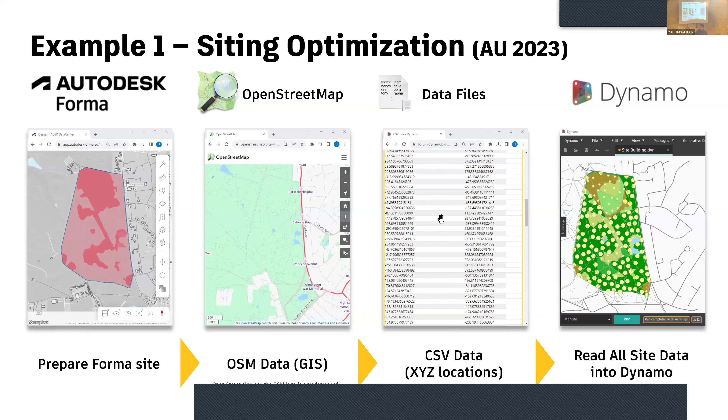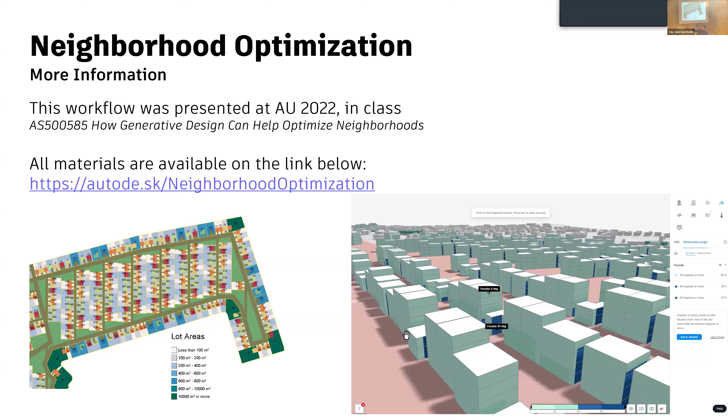I'm going to skip this one. Some architects have looked at creating master planning at a larger scale, optimizing neighborhoods using units—we'll look at one such case. This is creating lot areas, done through the use of API, not something out of the box. You'd have to tweak the API for generative design to come up with lot sizes, 100 to 200 square meters, 200 to 400. All these lot sizes are automatically understood, and you can create new formats from them—an API use case.

So there's a house configurator that somebody has developed—let's look at that. This was developed using Dynamo, but within Forma itself you can start pasting it in. The Dynamo player has all these values: main toilet width, main toilet depth, main bedroom width, main bedroom depth. For each room in the house, the person has given higher and lower values in square meters, creating a full house using the Dynamo configurator.

The Dynamo configurator is not code based, it's node based—you don't need to code, you just use nodes like in Grasshopper. What you see in front is the Dynamo player, which is pulling information from the Dynamo player, and then I'm populating this information onto Forma.

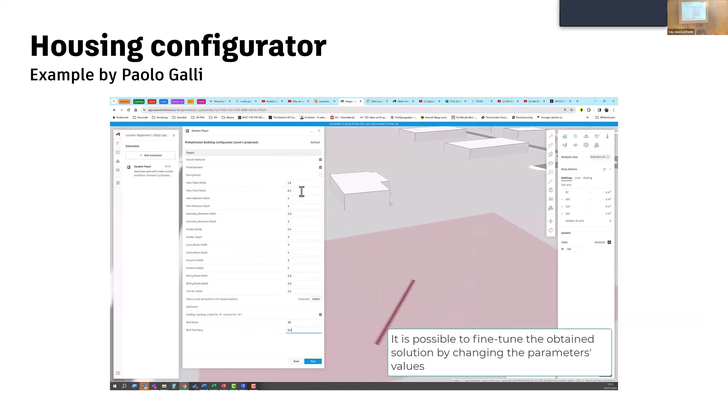Let's play this. If I give the positioning, the orientation of the house itself, it automatically creates a house for me and pushes that geometry into Forma. So the configurators are actually running that form—I'm not using Revit or another format to do it, I'm just using the logic to create a house. And that's the house.

If you change the room width or the maximum room size for the bedroom, the form is going to be different. It's a set of rules you can develop in Dynamo and run on top of it—multiple options can be generated.

Now that's the house, and you can start editing that in a 3D sketch, and analysis will work again. You can define it as a residential building, create anything you want—solidity, function—and start running solar, sun, daylight, everything in the box so you can identify the environmental factors and the design.

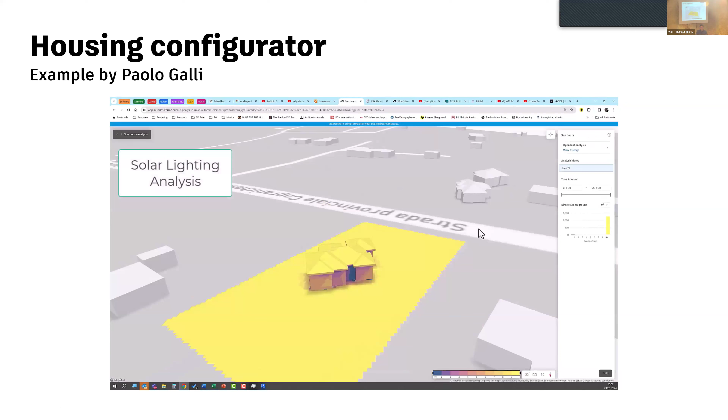I can take that data and push it into Revit straight away. You can see there's AI rendering—I can define autumn, for example, or winter, or whatever. So many ways to use Forma. Those are some beautiful renderings using it.

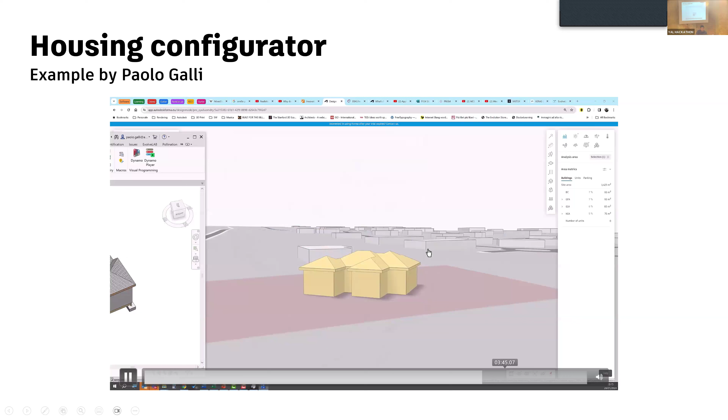That is quite cool. Now, in parallel in Revit, you can start doing the documentation and fabrication. People have used it for multiple purposes—you can test it as well.

For the last part, we're going to look at some examples of how you can use the current Forma configurators. This is one way a company has designed some modules in Revit and used them to create multiple options and variations within Forma itself. There's an AU class on this, and I'd encourage you guys to look at that class—it's called From Prototype to Platform, Delivering.

Copy this and paste it in the chat window, so please save it, at your own leisure. It's 30 minutes of video with an explanation you can run through. If I refresh, the guy speaks in the background and explains how it's done.

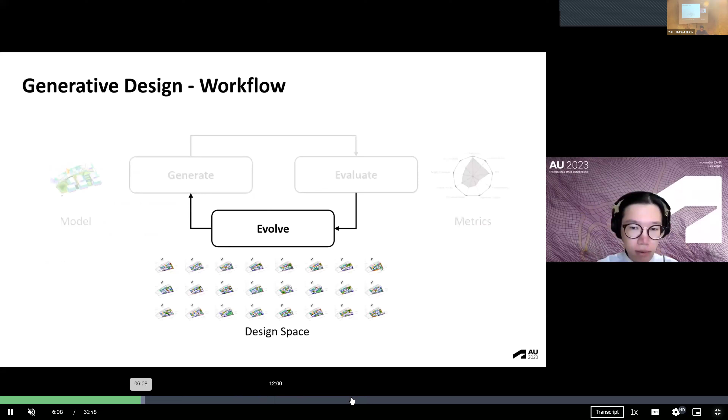Let me take it a little forward to show you directly—that's the approach, the Dynamo configuration using different options. These are different house types within Revit, and now those modules are one unit you can use as a configurator within Forma. They're Dynamo routines picking the Revit module and sending it to Forma.

Coding is involved here, JavaScripting. This is exactly the configurator—you're placing these units in different configurations and seeing the outputs from them. That's the unit catalog in Revit, with design samples and massing designs. That's it.

Just want to show you live—let's take it forward. Here it's just running in the background, they're adding some values in there and it's giving different configurations. The good thing is you can use your own configuration.

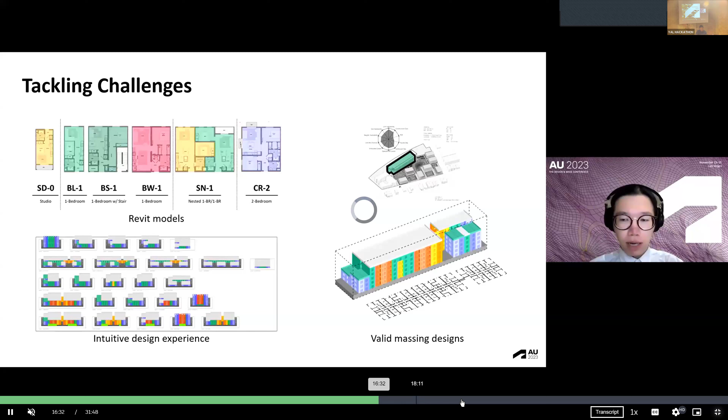So we are using the generator API as well as the embedded view API within Forma. In this case, we are not actually scripting using Python or C#. We took this approach because in this case, they didn't want to host the data on the cloud, so they actually ran it through HTTPs. The configurators were actually on their own.

So to start with, they began with the Revit unit catalog. They created a catalog in the Revit unit. That's the Revit unit catalog. And massing design prototype is also the configurator that's hosted on HTTP. They're using the Forma generator to generate options.

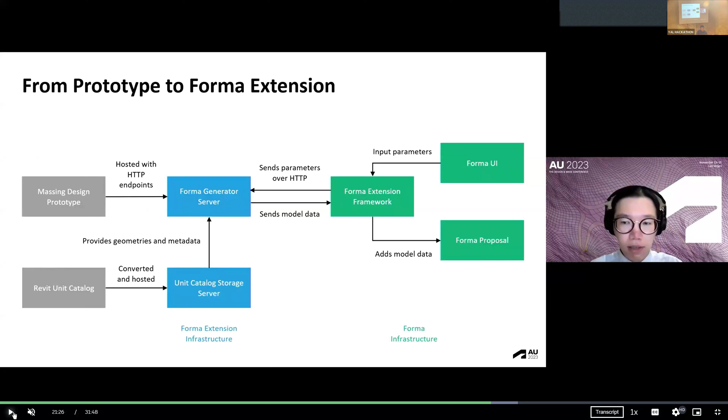This is the actual demo. Okay, so let's say these are the units which are already placed. Now I can use that extension. You can see that this is the extension, named Factory_OS Tile-Based Modeling. Somebody created that extension for their own office.

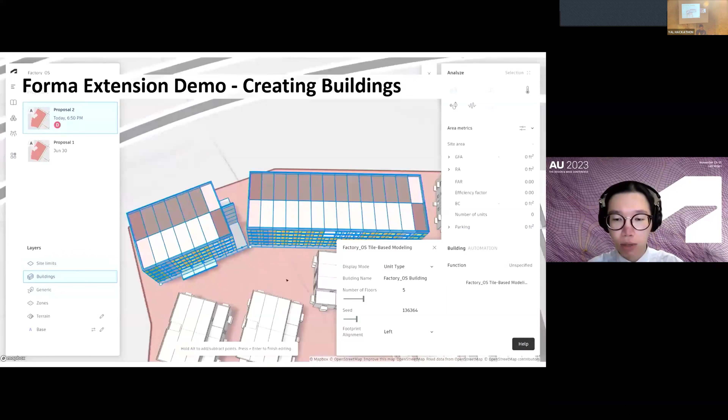Well, I mean, you're showing the possibility of what you can do on top of Forma. Yes, because to be honest, this has huge relevance to HDB. If you're taking on a project and suddenly the HDB owner tells you, how about adding one more study room in the 3-bedroom unit? Then what it means to the architect is that you have to redesign everything. But if you automate it this way, you can engage the owner in a different kind of conversation, instead of having to redraw everything, because after you redraw and rebuild everything, you have to run it through all the compliance checks.

That's the configurator, the DFMA check. And of course analysis and all is a given. But now, you guys can read the whole data, the story. There's a 62-page presentation, there's a handout. Please go through this at your own leisure and see where you'd like to open it.

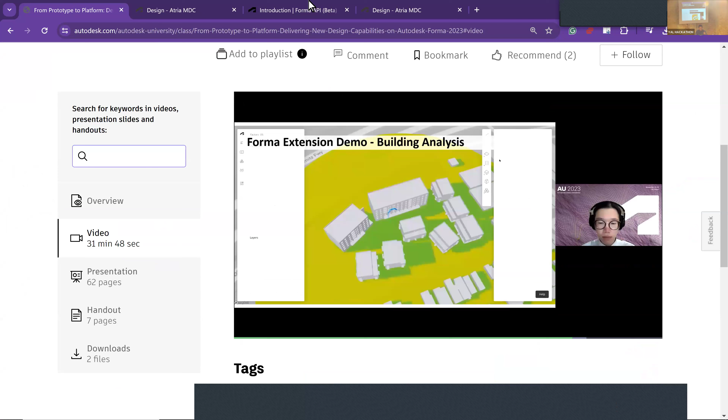Now going to the Forma API itself, you can access the API. Just type in Forma API, and it will immediately pop up as the Forma APIs. I'm going to copy paste this link here for you guys to study. From the API itself, you can launch the free trial for the Autodesk platform services, and that can be accessed here. Then you can go to the documentation of the API. There's more documentation on GitHub, but you'll find most of the procedures and tutorials on this website.